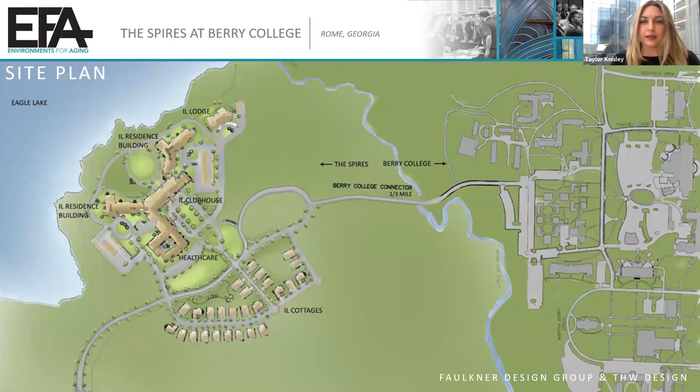The site was just a third of a mile away from the college, so it would connect the community and the campus by a simple walking trail. This allowed easy access to the campus for the residents,

where they could attend school functions and events, sporting events, or even enroll in courses. With seniors having access to the campus, Berry College has what they call a LifeWorks program, where the students work at the campus and gain personal and professional development experiences.

The Spires at Berry College, from its inception, was designed to partake in this program and allow students to receive real-world experiences that align with the academic study areas, and they benefit from career counseling, leadership, and mentoring that the residents are able to provide.

On top of that, from an interior design standpoint, we were able to provide several areas within the community that would support that intergenerational experience outside of the LifeWorks college program. We'll show a couple of these areas, but we provided a club room outfitted with a shuffleboard and game tables, and a multi-purpose room designed for lectures, speeches, community events, and musical performances.

The residents did request a meeting with the designer, so we were able to sit in the multi-purpose room and answer questions directly from the residents that lived there, which was a unique experience that you don't always get to hear those opinions after the project's completed.

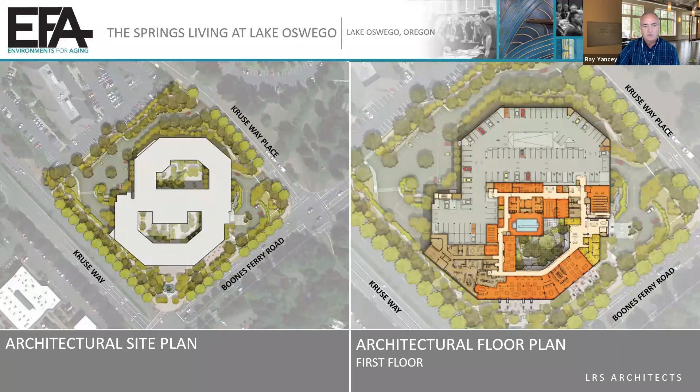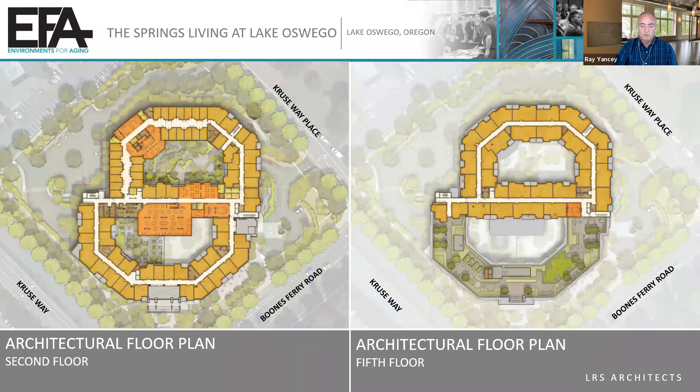These are the upper levels, showing the assisted and memory care, similar configurations with town centers where the efficiency of staff and residents can be in one place, while also activating those courtyards and getting a lot of solar daylight into those spaces. On the right-hand side you can see the rooftop terrace, created to solve a few problems. One was our height of 45 feet cut that off, so we couldn't put a floor there, so we were able to put a rooftop terrace which gave us more daylighting. It also provided more landscaping, which we needed to meet those requirements -- solving multiple issues, and it's a beautiful place.

Next slide. Next slide. Oh, sorry, looking at the wrong screen there.

This section really helps show the design and how we step the project up the 30-foot slope and tuck the parking into the hillside, while also allowing the activities to engage the courtyards and provide solar access -- south is on the left of this image -- and kept our stories to 4 stories so we could get good daylighting into those courtyards. Those are situated to activate the IL, AL, and memory care on those different levels.

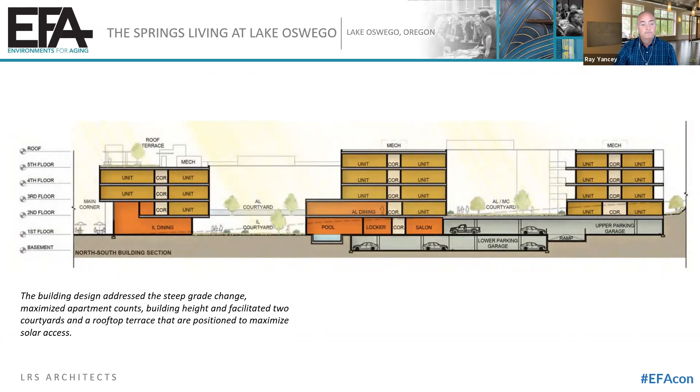Next slide. This is a representation of two views of the same courtyard. On the right you can see the AL up above, connected to their dining space with a covered area so they can spill out there. As you walk into the community, you're invited right into the landscape. That was a very important component, having that connectivity to the landscape on site, and the activities around the perimeter that can spill out and activate that courtyard.

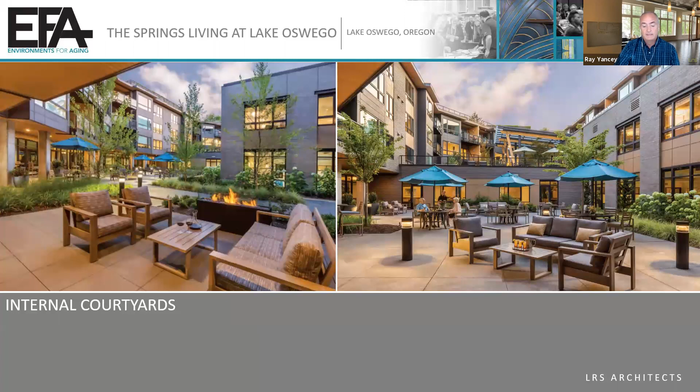This one is showing again that as you walk through the community inside, you're always connected to the landscape. It was very important that we maintain that view and activity, bringing daylight into the interior of the project. So wherever you're at inside the building, you're connected to the landscape.

This is the view of the rooftop terrace, which is a huge boon for this project. It wasn't anticipated when we first started, but as we went through zoning and tried to solve a lot of problems, this became the solution and a huge resource for the residents, loved by everyone.

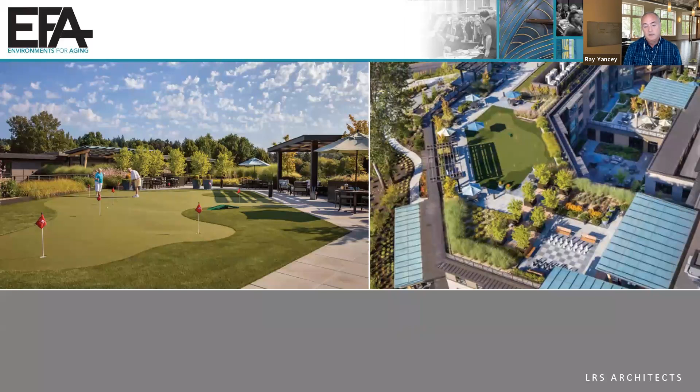It provides a whole different perspective up here. It's private and secure, but you still feel connected to the neighborhood because you can see the surrounding landscape. It has a lot of amenities in this area, including a dog walk, an outdoor wine bar area, barbecue, bocce court, and of course the putting green. It's a great amenity for residents.

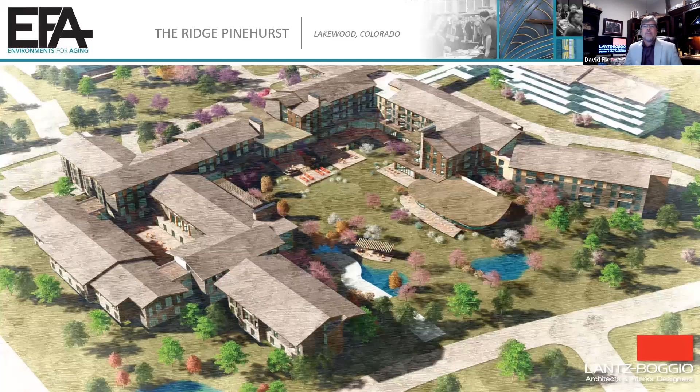Why is this all important? Well, it's an affluent community, and they focus a lot on outdoor activities and activities in general. So we incorporated these elements, and I'm going to cover the three primary objectives that we presented to the client, and sprinkle in a few other ideas that we presented.

They center around indoor-outdoor connectivity, wellness and fitness that is a response to the community but also invites the community to be a part of this site, and lastly, fitness and activities. Like I said, there are a few other items that I'll drop in there as well.

So this is the independent living portion of the building. To the bottom side of the image, you'll see where the community entrance is. One of the great things about this project is there's no reduction in level of amenities or level of care. The feeling from when you walk from independent living into assisted living and so forth is relatively the same. Of course there are things you need to take care of in assisted living and memory care, but the level of finishes is absolutely spectacular, and you'll see some slides coming up.

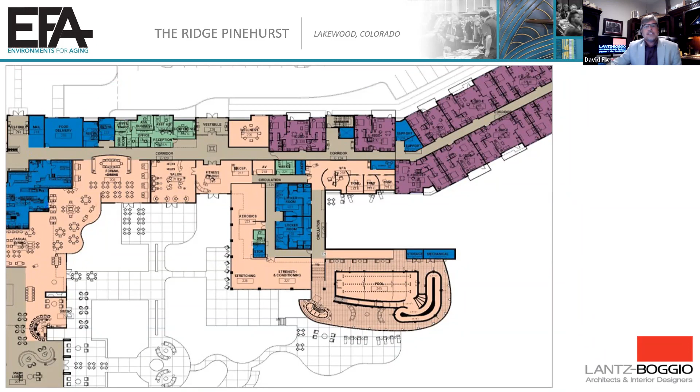So we'll go quick past the floor plan. And next slide. So the fitness area, next slide, has connectivity.

Thank you, David. Thank you for sharing this project. I'm sorry to rush you at the end there. We got a lot to cover. So I'm going to do the same thing, go through our jury comments.

One of the comments was this project had an incredible, strong connection to the outdoors and the surrounding communities, and strategies to ease the entry into the community. David mentioned the spa - the idea is that people could get a membership to the spa, see if they like the community, and then consider living there afterwards. There's also the integration of staff and residents, and the use of focus groups in their design.

So again, we're always looking at process and the innovative use of technology. The submission tip here is to zoom out a lot more now. I've seen this blowing up in the last few years - a real focus on context, not just building beautiful buildings that are inwardly focused, but how do we connect to our surrounding neighborhood? How do we be part of the community? How do we invite the community in, and how do we extend the elders out? I think this project did a great job of really focusing on that, and for that reason it stood out.

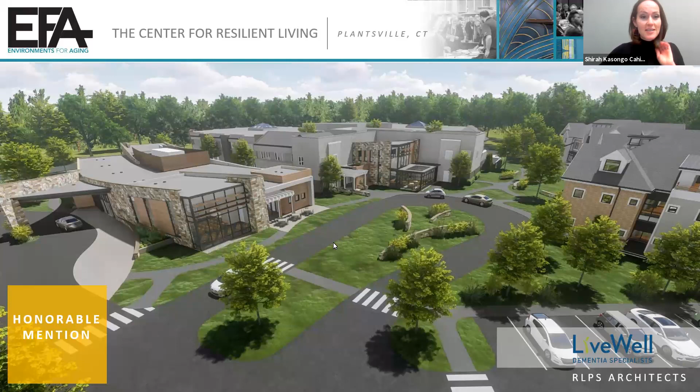And with that, I'm going to pass it to our next presenter, Dustin Julius, who is going to be speaking to the Center for Resilient Living.

Thank you so much. My name is Dustin Julius, I'm an architectural designer at RLPS Architects. We're located in Lancaster, Pennsylvania, and LiveWell is located in Plantsville, Connecticut. They are really a dementia-specific community that provides an unmatched level of care to their residents.

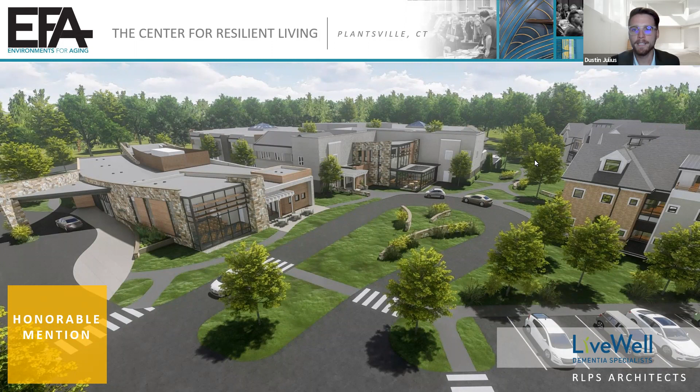And they were looking for the opportunity to advance their architecture to support these operations. But LiveWell's Center for Resilient Living, known as the CRL, kind of goes back to an earlier design philosophy that emerged really early on in the planning process.

And that was really, we wanted to design with the residents who are living with cognitive impairment, not just for them. So we made an effort to partner with the community residents, those people living with dementia, their family members, and really beyond, in order to reinvent this campus.

So the CRL that you see depicted here on the left was informed and really co-designed by people living with dementia. They served as the experts that helped us define priorities and objectives throughout the process. If you go to the next slide, you can see that the site plan here is really sort of three parts.

They have an existing series of atrium buildings, shown in purple, which are currently skilled nursing. We're working to convert the lower level to assisted living—the CRL you see here on the left. Then there's this new product, the river homes, in blue, a cooperative housing product that's more of an independent living memory care product.

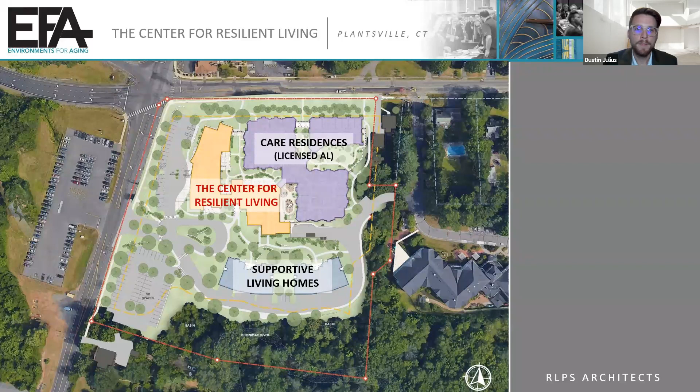If you go to the next slide, really the first phase was about defining program goals. We engaged residents, staff, and family members, asking them to participate in focus groups and a design charrette, where they worked within a framework we borrowed heavily from Dr. Allen Power's 7 domains of well-being.

Those domains are identity, connectedness, security, autonomy, meaning, growth, and joy. We took those words and put them into graphics on the wall with cup imagery, and asked participants to respond to question prompts. They'd write their responses on color-coded Post-it notes—physical, operational, or personal in nature—and place them on the posters, either filling the cup as a positive idea or draining it.

These responses and suggestions evolved into a series of themes that included variety of space, interaction with others, connection to nature, freedom, opportunities, multisensory appeal, and diversity of experience.

This methodology promoted a beautiful synergy between the staff, the administration, and our design team in order to help residents verbalize their ideas. Throughout the planning process, the entire team was challenged to constantly listen and partner with these individuals.

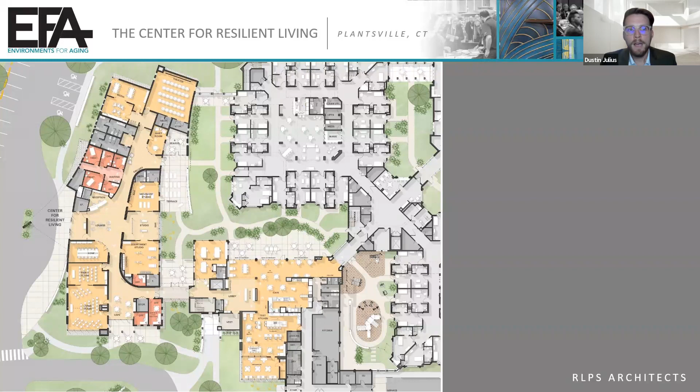In addition to serving residents, the CRL extends its service to the surrounding community, providing LiveWell a platform for monthly memory talks, education seminars, and other initiatives that drive positive change through research, thought leadership, and education. The next plan shows how the Center for Resilient Living extends beyond those living on this campus.

It also departs from the multi-purpose concept we're used to seeing for adult day centers. Currently, LiveWell just has one 700 square foot space that residents use for adult daycare. This is a total inversion of that philosophy, instead providing a series of distinct venues, each specifically imagined for a unique function and designed around creating diverse experiences.

These destinations serve as a cafe, a demonstration kitchen, a greenhouse, and classroom hubs. There are visual arts rooms designed to feel like a studio, with an exposed ceiling and natural northern daylighting. We have raw concrete floors that provide a real space for creating, whether painting, pottery, or other works of art.

The Performing Arts Theater is one of the more grand spaces, with intentionally designed acoustics, a dance floor, a movable stage, and supporting technologies. The Exercise Equipment Studio and the Yoga and Movement Studio integrate with each other, as well as with the treatment rooms, to support physical strength and dexterity.

The plan takes a fresh look at the idea of a meandering loop. Instead of that strategy, it organizes a free-flowing corridor reminiscent of a river. That idea harkened back to a fundamental concept: we wanted to catch residents, catch individuals, before their cognitive impairment had progressed, and provide them support earlier in their process.

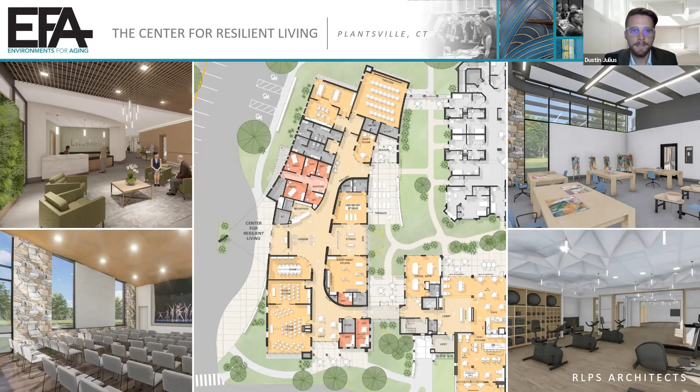That corridor included those destination spaces as well as interstitial spaces along the way that widen for a variety of other purposes. If you go to the next slide, there's a series of existing courtyards we were building upon, but we've reimagined them with intergenerational play areas, outdoor dining opportunities, and event spaces.

Autonomy was really a true inspiration for the CRL, and the project team made a conscious effort to nurture freedom of movement and individual choice rather than managed experiences. The goal was to create a unique campus master plan with a series of free-flowing indoor and outdoor spaces that could be accessed without the use of locked doors.

And we did that by strategically positioning the CRL to create new opportunities for yoga and meditative fitness activities.

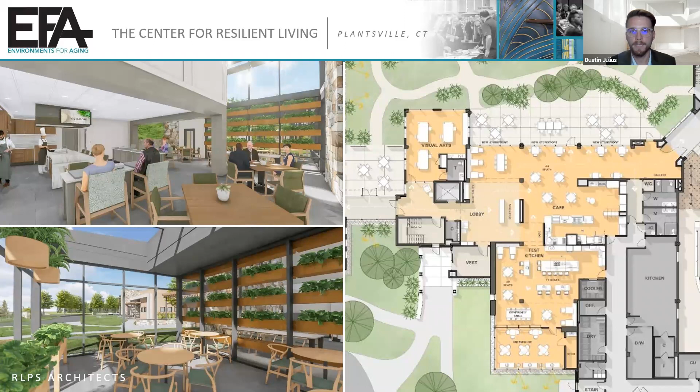The next exterior rendering shows how the community was brought into the early parts of the planning process, and how design conversations remained at the heart of these core design decisions. Because of them, along with their loved ones, those are really the people we were seeking to serve through this process.

Really, the Center for Resilient Living is a new physical space, and we designed it as a way of offering resources to build the capacity of people who are aging and support them in living resilient lives, both on campus and in the broader community.

The CRL, we really sought to define a new paradigm for architectural design that promotes authentic autonomy and freedom, while maintaining that sense of security and ultimately supporting vibrantly connected lives full of growth, meaning, and joy. Thank you.

Thank you, Dustin. This project is also amazing. So I'll go through our jury comments for this one.

The metaphor of the river creates fluid space. The design embraced destination spaces rather than the classic loop. This focus on freedom and independence, and really the integrity with which the design team operated and designed with as opposed to for, led to thoughtful and profound participation.

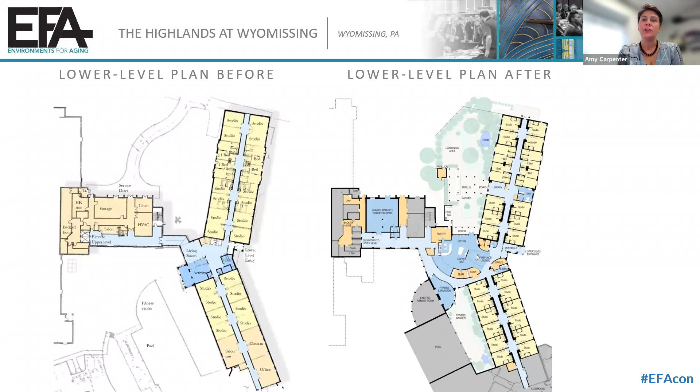We expanded the existing campus fitness room space, giving more space for fitness, but also allowing easy access for assisted living residents to continue their fitness routines. Finally on this plan, in the lower end, we also created a new fitness garden space with rubberized paving and shade sails so they could hold outdoor fitness classes.

On the left, you see what was previously an unused, inaccessible area outside the north wing of the building. We transformed this into a new garden with a variety of zones for both active and passive outdoor activities or outdoor use.

There's a koi pond in the back right corner. On the back left corner is a horticultural therapy area with raised planters, and there's a garden shed - you can see the top of it with the cupola there.

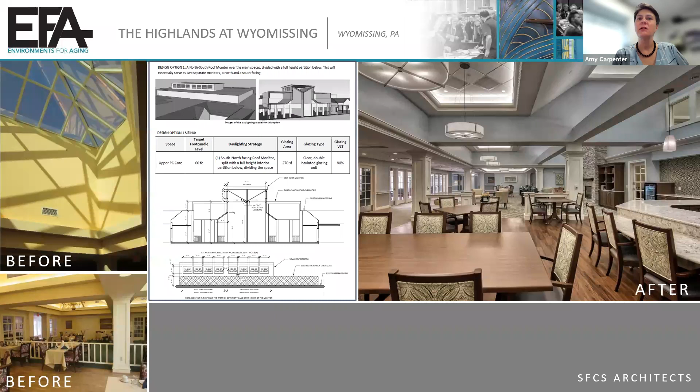Thank you, Amy. That was great. Perfect timing as well. So I'll go into our jury comments.

So what really stood out for this project was the emphasis on research, which made it unique: the attention paid to lighting and comfort, the exterior patios, bringing the program outdoors, and the impressive mitigation of glare. This was actually the only project we had submitted that had any focus on research at all, and this focused so much on lighting and learning from this process—really looking at the nitty gritty, getting into something very specific and succinct.

So the submission tip here is: research and development is cutting edge. Anything we can do to make the next project even better, because look at what we've learned from this project and being intentional about that—that's where the innovation was. So thank you again for that great project.

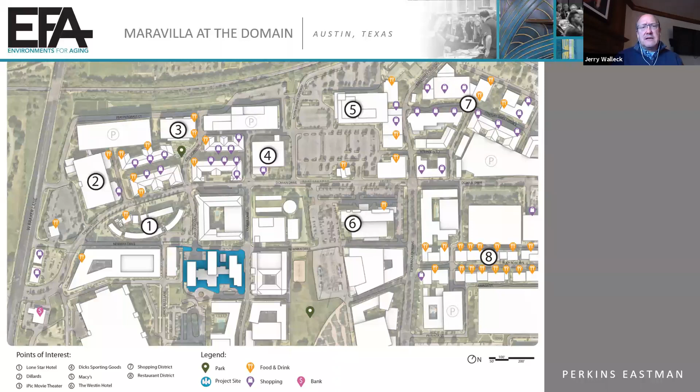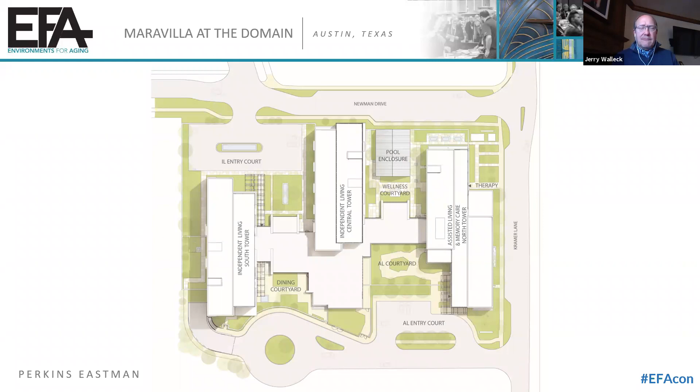Next slide. This will give you a better feel for the first floor. On the top middle bar is all the wellness functions, and you'll see the pool and the locker room. The middle bar to the lower side is the kitchen and the 3 dining venues. To the left you'll see more of a small administrative office suite, marketing, and then the cultural aspects of the town center, each with a different themed courtyard that they open onto. The right tower is dedicated to the assisted living program, with the dining room and functions of assisted living on the first floor.

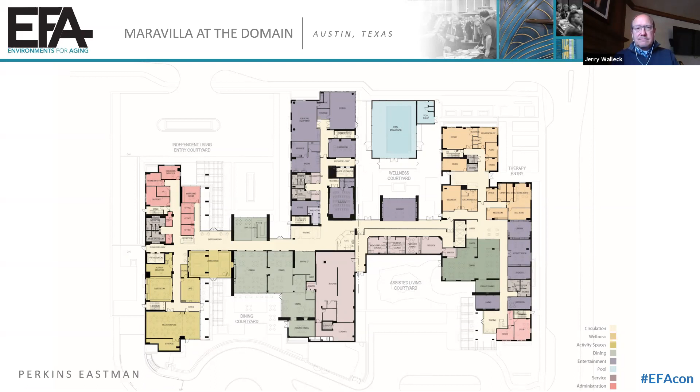The other thing we discussed while programming the building was the advantage of being connected to so many other entertainment options, especially restaurants. You're able to look at your operations for a building like this and reduce what you build for dining venues, theaters, and some wellness programs, because there are other things so close to you. Creating that connection for residents to get out and experience those other things is one of the major goals of a project like this.

Hopefully in the long run, SRG wants to strive for not only the residents of this building depending on the amenities outside, but the people who live in the community starting to depend on the amenities within the Domain, within the Maravilla project here.